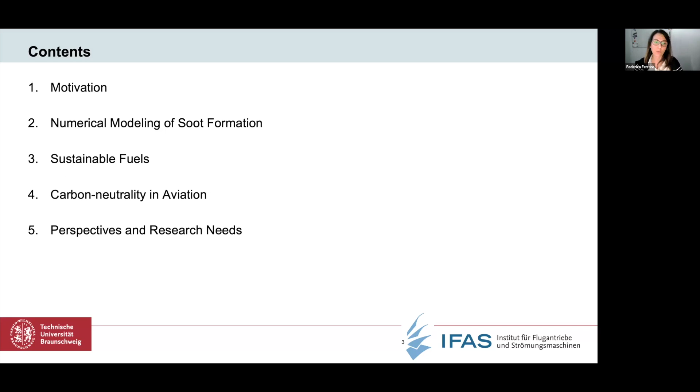The first question I would like to answer today is why we should still care about soot even with sustainable fuel. As a combustion research community, our overarching goal is to try to improve our current technology and, as a society, reduce the increase of temperature and global warming below 1.5 degrees Celsius until 2050.

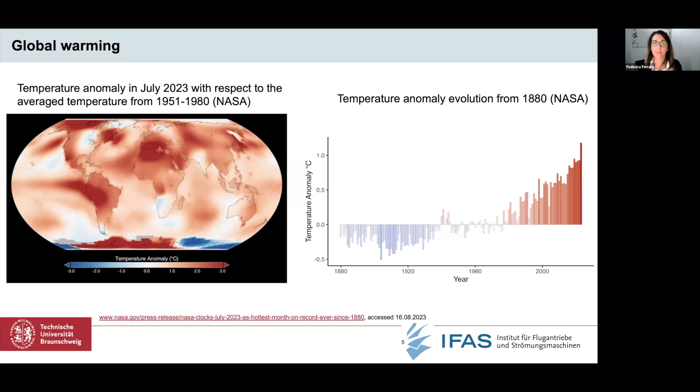So from atmospheric research, it's basically clear that this temperature increase is due to anthropogenic emissions related to human activities. So we are talking about industrialization, but also transportation.

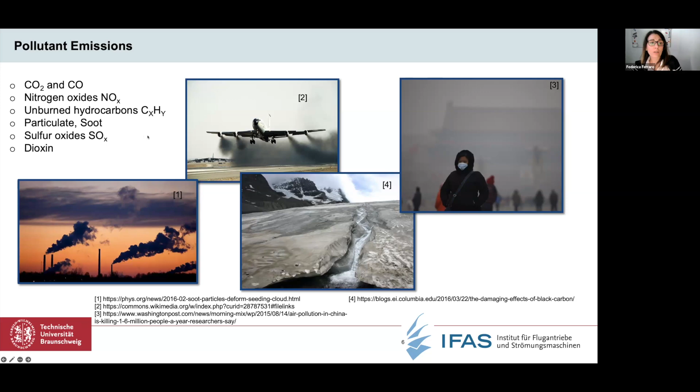So basically, this is the scenario in which we are moving, and when we move from current hydrocarbon fuel to some sustainable fuel, we should take care not only about CO2 emissions, but also how this new type of fuel that we would like to introduce affects the different types of emissions and soot particles.

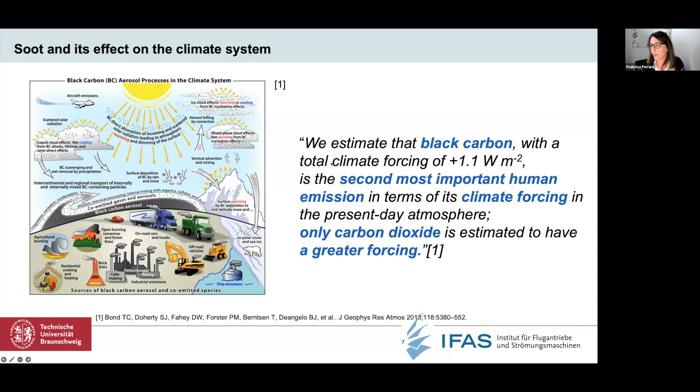In order to understand which sectors are affected by this, I would like to discuss a little bit the latest results, some data published this year from IRENA, the International Renewable Energy Agency, on hard-to-abate sectors.

So there's heavy-duty trucks, shipping, aviation, and then hard-to-abate industries like the iron and steel industry, and also chemical industry. This hard-to-abate sector, obviously in different ways,

are defined like that because the electrification transition towards zero carbon emission is quite challenging due to the specific peculiarity of the processes involved in the energy transformation, and also because even though there is a lot of research in these sectors to decarbonize them, the maturity level of the zero carbon technologies is still quite low.

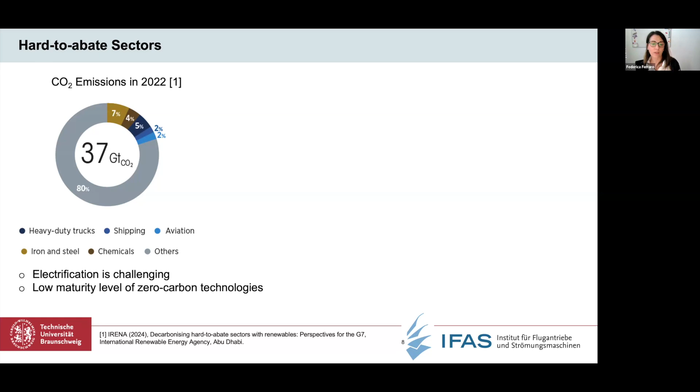In this report, they basically try to give some advice to politicians, to people developing policy, on which direction they have to support the transition, and which are the most important aspects related to this hard-to-abate sector. So for this sector, it is not possible to think that by 2050 everything will be completely decarbonized at a level of technology maturity like it is today.

So in this talk, we are going to discuss some of them, in particular the transition related to the hard-to-abate transportation sector, where in the short term and medium term we can think that liquid drop-in sustainable fuel will be of major importance to reduce carbon emissions.

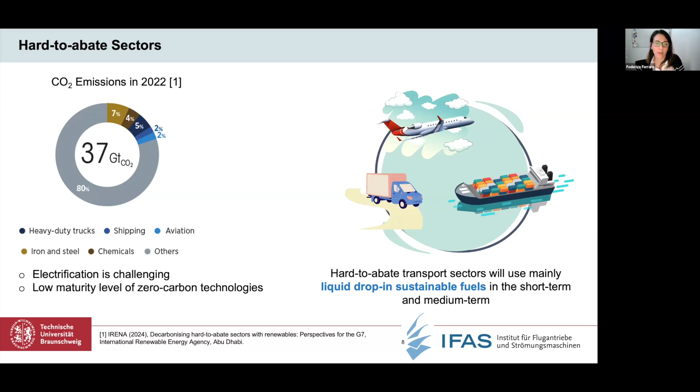So we are basically talking about carbon neutral fuels that can be produced or generated using the power-to-liquid concept, which means we are basically using renewable energies for the production, and also carbon capturing from the atmosphere, or we are taking the carbon from waste or biomasses.

This type of fuel can fit in the current infrastructure. This means it can be directly used in current engines or current burners, or they can be used with minor retrofitting.

Due to the different chemical structure of this fuel, we can reduce carbon emissions, and in some cases we can even achieve sub-zero, a negative carbon emission, meaning that we are taking more carbon from the atmosphere than what is released after combustion.

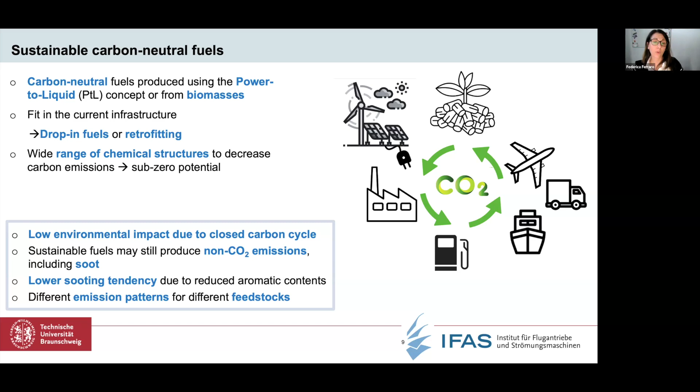Therefore, we need to understand how this sustainable fuel works, or how it performs in the different types of engines that we have to decarbonize. With that, I would like to move to the second part and discuss how we can model soot, the model that we have used in our group in the last years.

When we deal with soot formation, we are talking about a complex multi-phase problem. For example, in an aero engine, we inject fuel in liquid form, so we are talking about at least a two- or three-phase problem: we inject fuel in liquid form, then the fuel evaporates, becomes gaseous, combustion occurs, and after that we may have the formation of soot particles.

When we want to model this with numerical simulation, we need a model that accounts for the entire chain. We need a gas phase mechanism able to characterize in detail the formation of the soot precursors, which are the large polycyclic aromatic hydrocarbons. We also need a model able to consider the formation of soot particles and the transfer of mass between the gas phase and solid phase.

When particles are formed, they interact with the underlying gas phase, and there is also interaction between particles. This effect needs to be considered in our model in order to track the evolution of soot particles and eventually their oxidation properly. Obviously, the coupling between the gas phase and the soot phase also needs to be considered to account for the mass transfer from gas phase to solid phase.

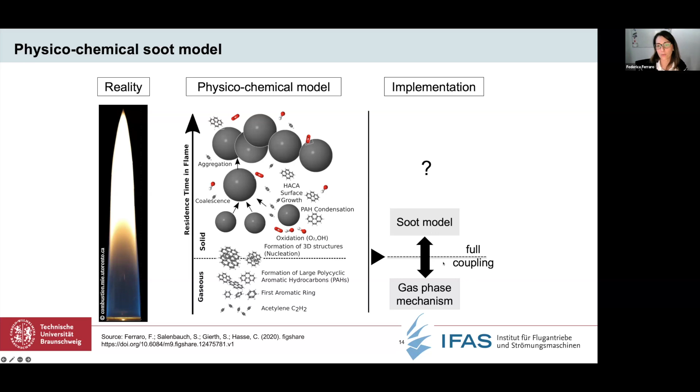After the model is conceived, we need to validate it, and normally this is done from simple to complex, meaning we start with laminar, simple lab-scale flames. Then we move to turbulent cases, still at lab scale and atmospheric pressure. Then we move on to model something more complex.

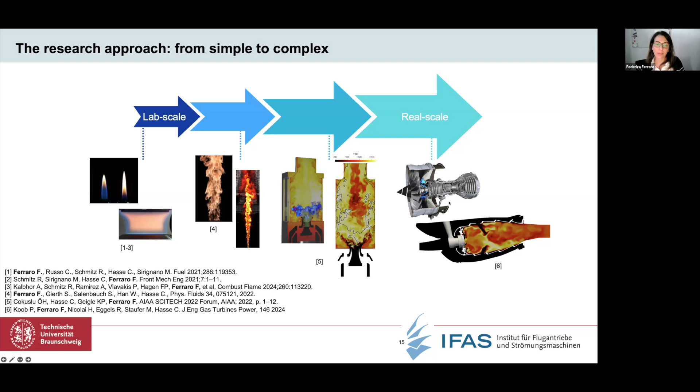For example, a lab-scale model gas turbine. Only when we have achieved this level of confidence in our model can we think about performing simulations of real-scale engines, where we have a very limited amount of experimental data to validate our model. So the validation process starts here, and after we reach this level of confidence that our model works well in different conditions, we can apply it to very complex and expensive simulations.

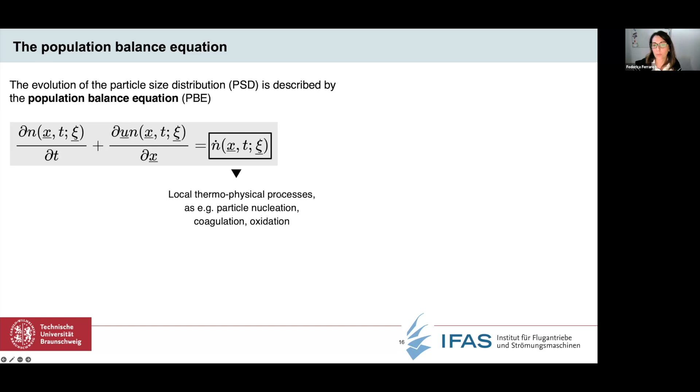The source term on the right-hand side of this equation represents the local thermophysical processes which describe the particle evolution, meaning particle nucleation, coagulation, and eventually particle oxidation.

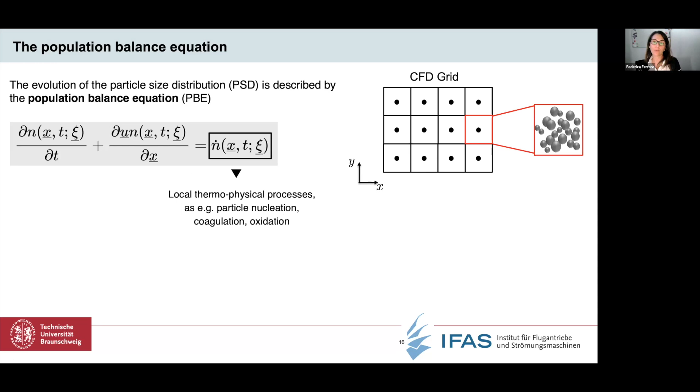Looking at the way this equation is written, if you consider that we are solving it using a finite volume concept, normally we have one value of the variable we are solving for in the CFD grid, or in the CFD cell. In this case, we don't have a single value, but a distribution which looks like that. So on each cell, we have a distribution function of the particle properties, which, as I was saying before, can be particle diameter or particle surface.

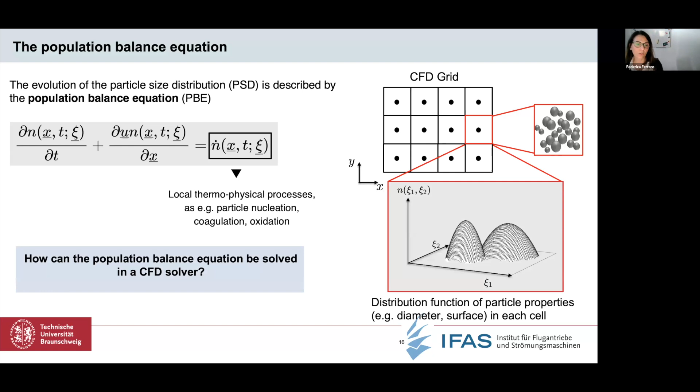So now this is quite complex and cannot be solved directly using the standard CFD solver that we use when we solve the Navier-Stokes equations.

In our group, we use the method of moments, which applies a transformation of the population balance equation for the moments. So we have this equation that depends, as I was saying, on space, time, and the vector xi of the internal coordinate of the particle properties.

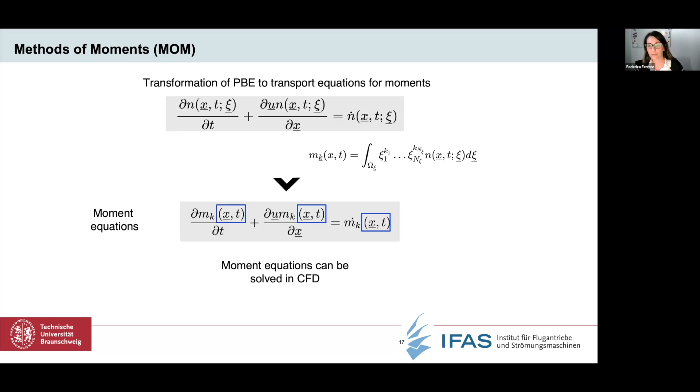If we apply the definition of the moment, which is the integral of the internal coordinate, the different components of the internal coordinate to the power of the moment, multiplied by the particle density, what you can see is that we obtain a moment equation that depends only on space and time. This equation can be solved without any problem in any CFD code, because it depends only on space and time.

Obviously this transformation doesn't come for free. We still need a closure for the source term, which, as you can see here, depends on the particle distribution. We need to apply a closure model, and in this case we are using the quadrature-based method of moments.

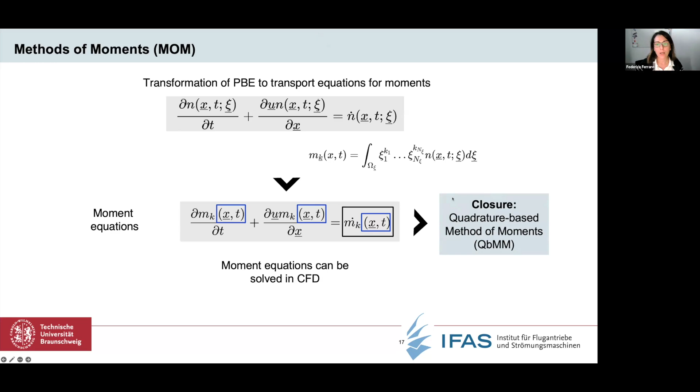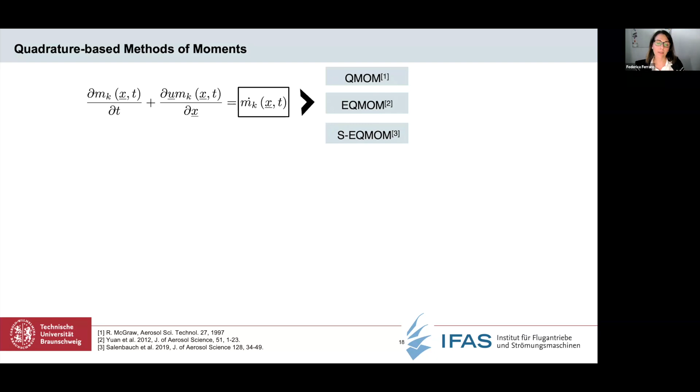In the literature, there have been different types of closures for the method of moments. You see here in the references, we have the standard quadrature method of moments, the extended quadrature method of moments, and in my group in Darmstadt, the split-based extended quadrature method of moments, which has been developed by Salenbauch and co-authors in 2019. We have applied this to a series of simulations and test cases that I'm going to show in the next slide.

This also allows for numerical robustness, because we transport each sub-number density function independently, and they are then coupled together through the coagulation term. Each sub-number density function is solved by transporting only the first three order moments of the distribution. This allows us to solve only low order moments and to achieve the numerical robustness that we need when we want to calculate very complex and accurate simulations.

So this is the description of the model, and now, following our research approach from simple to complex, I'm going to show some examples of the application of this split-based extended method of moments to different types of flames. Obviously not everything we have done, but just some examples to show how our approach has developed over the years.

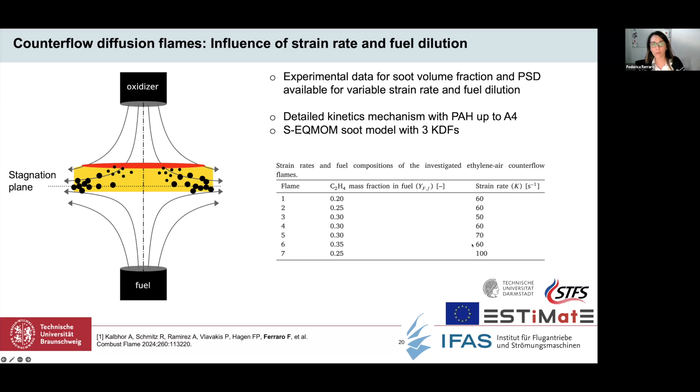After that, we analyzed this data. We investigated what is happening in terms of soot formation and the different types of processes happening on the soot particles. For this, we analyzed the different source terms, and you can see here the inception, condensation, and HACA source terms for the different strain rates.

Even though the soot volume fraction was different, and we have seen that it decreases while the strain rate is increasing, here we can see that the soot source terms have a very small influence on this. This tells us that the reduction in soot volume fraction is due to a smaller residence time of the particle caused by the increase of strain rate.

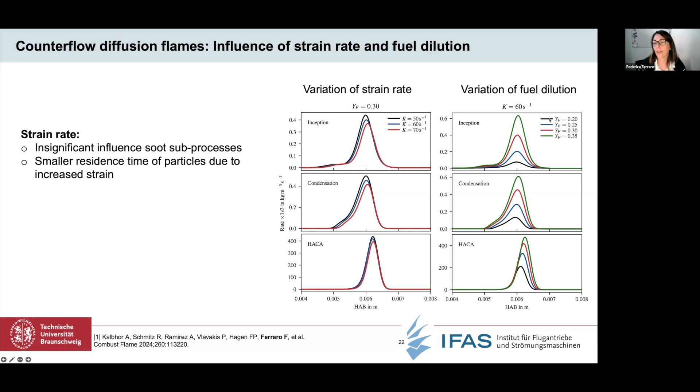If we now compare what happens at the source term when we varied the fuel dilution, again increasing the amount of ethylene in the fuel, we see a significant difference in the source term for the different flames. In this case, we see a visible reduction of the inception process and also of the other phenomena, condensation and HACA, which are responsible for the soot surface growth.

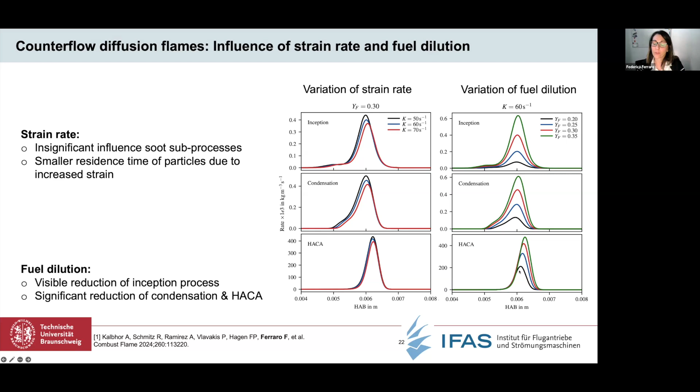This tells us that even in a very simple laminar flame configuration, we have different modes of action, and our model is also able to quite well reproduce this phenomena when compared with experimental data. So after this step, we looked at some more complex flames, and we moved to the simulation of turbulent flames.

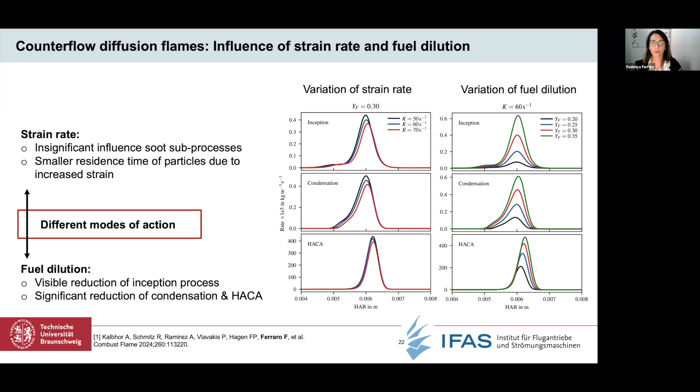For this case, we chose one of the target cases of the International Sooting Flame workshop, as I was mentioning before. This is a natural gas diffusion flame where we have a fuel containing methane and nitrogen.

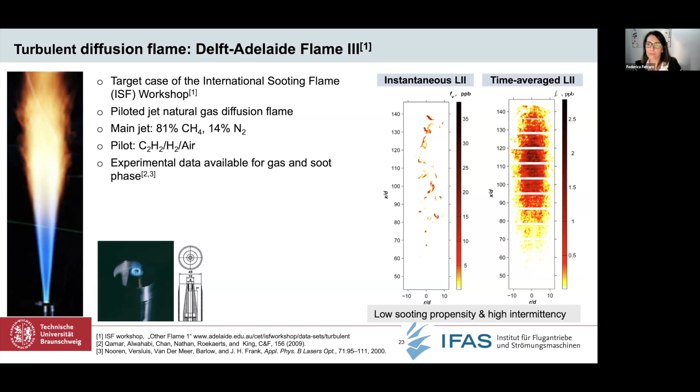Here is the experimental data regarding the instantaneous LII, and also the time-averaged LII. Due to the properties of the fuel, being a methane flame, we have a very low sooting propensity and also high intermittency. This means that in the experiment, these results have been generated averaging for a longer time, and in our simulation we also had to average for quite a long time to get significant statistics.

For this type of flame, we applied a different modeling approach for the gas phase. We used a tabulation strategy, creating flamelets using a counterflow diffusion flame configuration, and we saved the entire thermochemical state in our table.

We applied a beta PDF integration and created a database that can be accessed using a reduced number of variables, not the entire thermochemical state, but only three variables: the mixture fraction, its variance, and the progress variable. This table is then coupled with our OpenFOAM framework, and we could calculate this flame in our CFD solver considering only three control variables, accessing this table.

For the coupling between the gas and solid phase, an additional transport equation has been solved, considering a lumped PAH species, which is then coupled with the soot model. This source or sink term considers the transition of the carbon atoms, or PAH, from the gas phase to the solid phase.

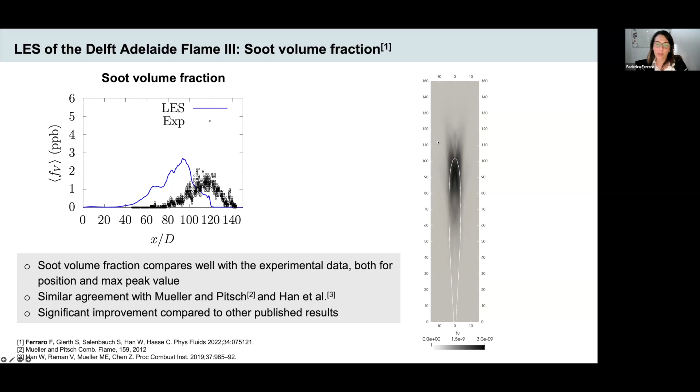Our approach, this SEQMOM model I was mentioning before, allows us to reconstruct the particle size distribution, which is an important characteristic to analyze when we move from standard type of fuel towards something sustainable, since we also want to minimize the particle dimension. Therefore, we need methods that allow us to characterize the particle size distribution.

What we can observe is that the maximum particle diameter of this flame is quite small, and this is also consistent with the fact that we are burning methane as a fuel and not a more complex hydrocarbon.

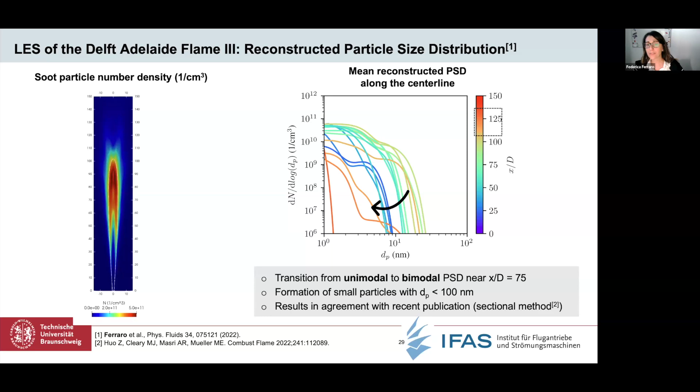After this analysis on the turbulent flame, we performed further investigation on a more complex case: a full-scale aero-engine combustor, the BR710 combustor from Rolls-Royce. This is another activity done during this ESTiMatE project at STFS in Darmstadt.

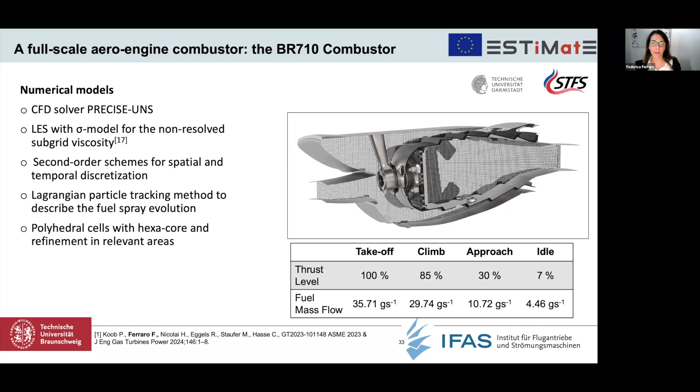In this case we used a different solver, as part of the collaboration Darmstadt has with Rolls-Royce. You can see here the grid we used, which is quite refined in the rich region. This is a rich-quench-lean aero-engine combustor, and we performed large eddy simulations at 4 different operating conditions, corresponding to different thrust levels and fuel mass flow, which lead to different types of emissions during the flight mission.

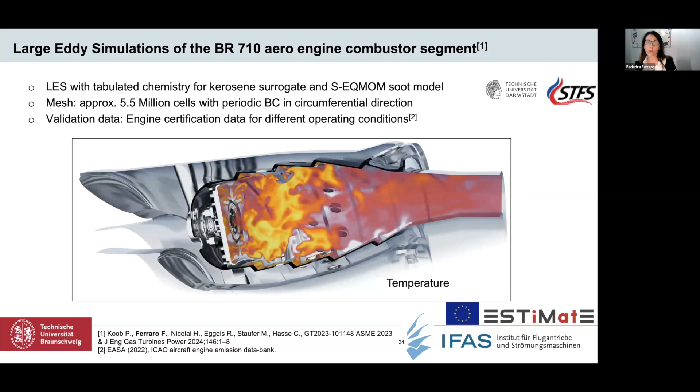Let me show you some results. This is a video of the temperature. You can see that we have high temperature in the rich region. Then the temperature is reduced, and also the soot volume fraction is reduced, due to the secondary air injection in the quench zone.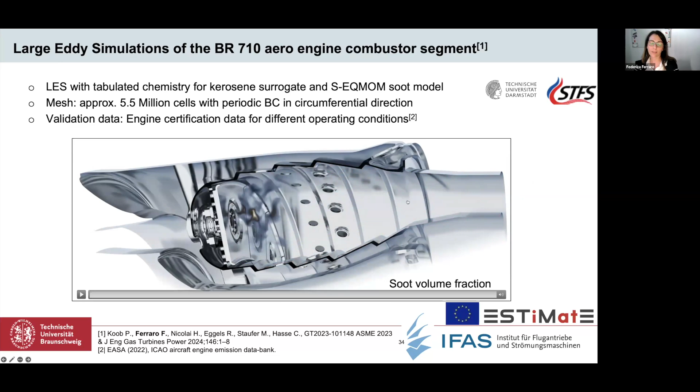And then the last part is the lean region of the combustion chamber. We can see here the time average and also the instantaneous soot volume fraction at the different operating points, going from the maximum of the fuel mass flow at takeoff to the most lean case, which is idle. We basically see a significant variation from the most rich case, takeoff at 100% of the power, to 7% at idle. So there is a significant variation in the soot volume fraction.

What we also observe is that in the quench region, we only have very small soot pockets remaining, and then we basically see that only a few amount of soot volume fraction remains not oxidized in the lean region.

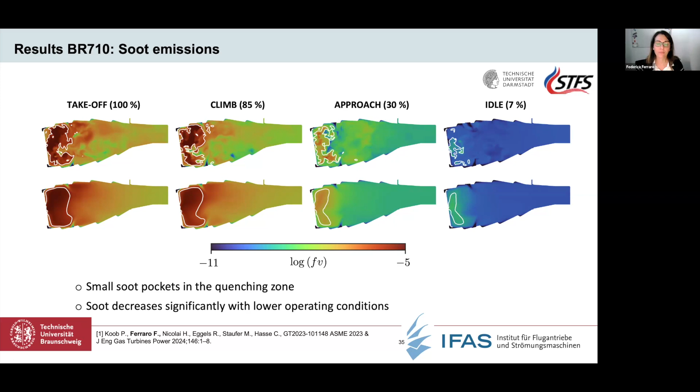In order to better characterize these results, we have compared this with experimental data. You can see here the different conditions we have compared, with experimental data from the ICAO database. As I was saying, for this very big real scale combustor, we only have a few experimental data points. In particular, the emission index of the soot particle is averaged on the outlet of the combustor, so we don't have the possibility to tune or validate our model to understand where the weak part of our model is. Therefore we need all the validation that I showed you before.

What you can also see here is that we obtain an overall good agreement with the experimental data. We only have a little bit of under prediction at the takeoff condition.

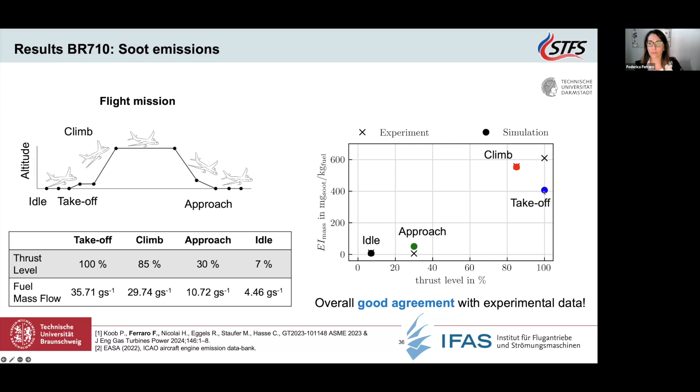Exploiting the results we obtained with our detailed soot model, we could analyze the particle size distribution in the combustion chamber, at the four operating conditions and in different regions: the rich part, the quenching part, and also downstream in the lean part. What you see here is that in the rich part, as we expect, we have a bimodal distribution at maximum power, at takeoff, and then at idle, which is the leanest case, we basically obtain only a unimodal distribution.

Then we observe that the particle number is slightly reduced in the quenching zone due to particle oxidation, but we still see a bimodal shape, while in the lean region we can see a significant reduction of the particle size and particle density due to oxidation. What you can also understand is that we need some residence time for the complete oxidation to take place.

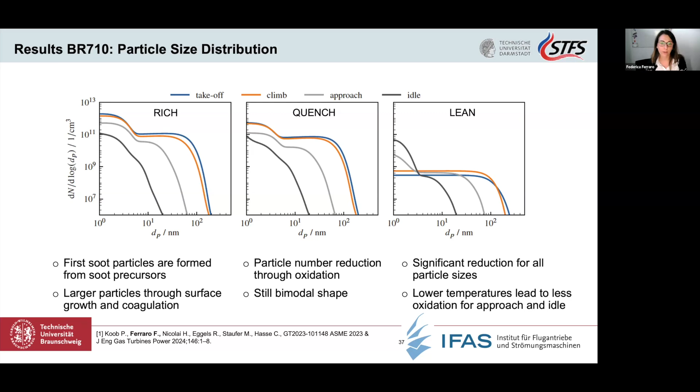Okay, so with that I would like to move to an example of sustainable fuels. All that we have shown has been done considering standard hydrocarbon fuels. When we move towards sustainable fuel, the entire chain needs to be redone in order to evaluate if we have a proper model, and if we are able to evaluate the same turbulent lab scale flame and also the more complex case with sustainable fuel. So the example I'm showing is only to illustrate how the particle size distribution changes when we use sustainable fuel.

This is an example of oxymethylene ethers, which are fuels studied as a substitute for diesel engines. What you can see here is different types of fuel, different classes: alcohols, ethers, and biodiesel. In our study, we have analyzed oxymethylene ethers, which are called PODE or OMEs.

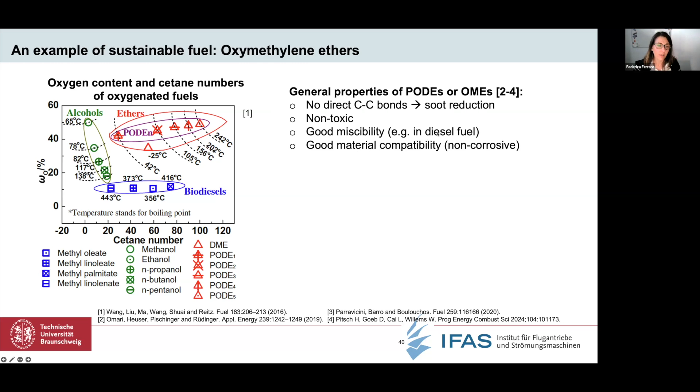They have, as you can see, a high cetane number and also high oxygen content, therefore they are selected as a substitute for diesel fuel. They have no carbon-carbon bond, and therefore allow, when burned, a significant soot reduction. They are not toxic, and they mix very well with diesel fuel, for example in blends. They are also not corrosive, so they have good material compatibility, and therefore have been studied and selected as blending agents for diesel fuel.

There are different types of molecules. We have focused our attention on OME3 to OME5. As you can see from this graph, they have a suitable cetane number and also a suitable boiling point for self-ignition engines.

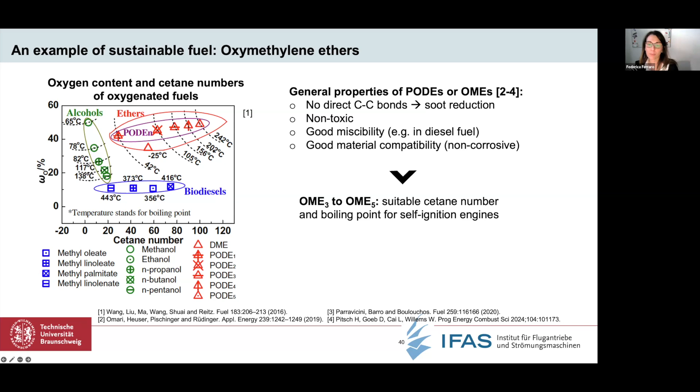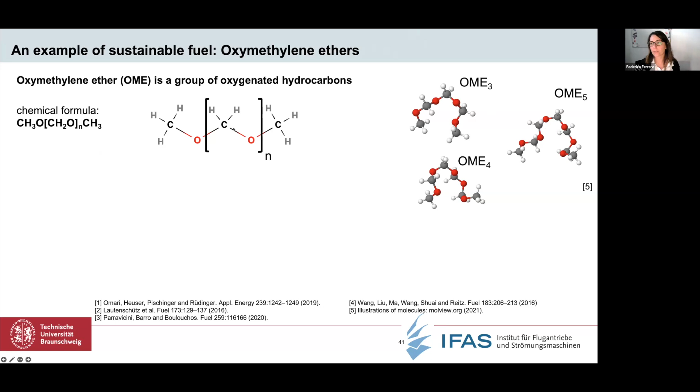These are the chemical formulas. The OMEs have basically this CH2O group, which can be replicated many times, so you can see here that the form of the molecule changes. If we have OME3, we have 3 of this group, and so on. So 4 and 5 in this case that you see here.

So the research on sustainable fuel has been done like that. There have been tests at engine scale that show that blending OMEs with diesel, or burning OME pure, leads to a significant soot reduction, but it was not clear why.

So in order to efficiently use the sustainable fuel that, just to remember you, is not available in large amount, we need to answer as researchers several questions. First, what is the mechanism of soot reduction? Then, is there a soot suppression effect, or a dilution effect, when we blend these fuels? And then, which of these OMEs, since we have different types of molecules available, is most suitable to be blended, and also what is the blending ratio, and obviously many other questions.

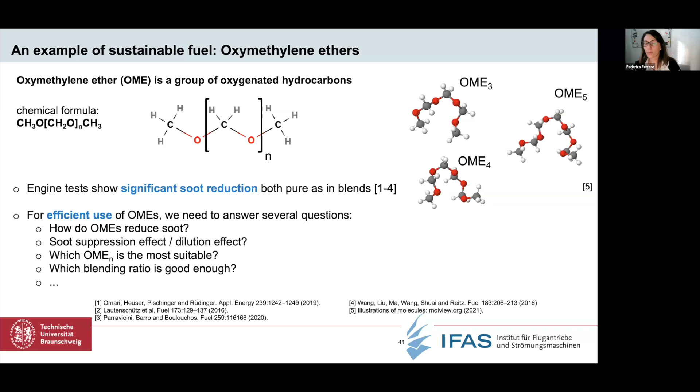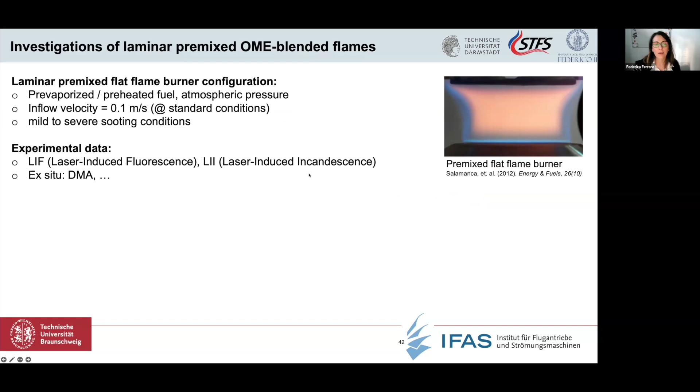So we have done this in collaboration with the University of Naples Federico II, with Professor Mariano Sirignano, who provided us experimental data of laminar premixed burner configurations, the one you can see here. They've done LIF measurements, so laser-induced fluorescence, and also LII, and we have done the corresponding numerical simulation of this.

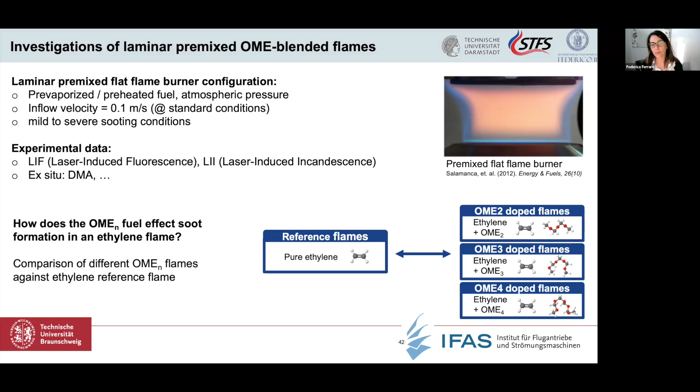We have a reference flame, which is a pure ethylene premixed flame, and then we have doped this flame with 20% of OME 2, 3, and 4, to evaluate the effect of this. Consider that when we perform this kind of experiment, the boundary condition also has to be selected properly in order to be sure that we are looking at the exact effect. So basically, we have kept the carbon flux constant in order to really look at what is happening in terms of soot formation. So let me show you some results.

So what we are basically observing is that the OME blending, so the blending with sustainable fuel, is reducing the dimension of the particles, but the small nanoparticles remain almost untouched. This is obviously quite important, because the smallest particles are also the most difficult to filter in a car, for example, or in heavy duty trucks.

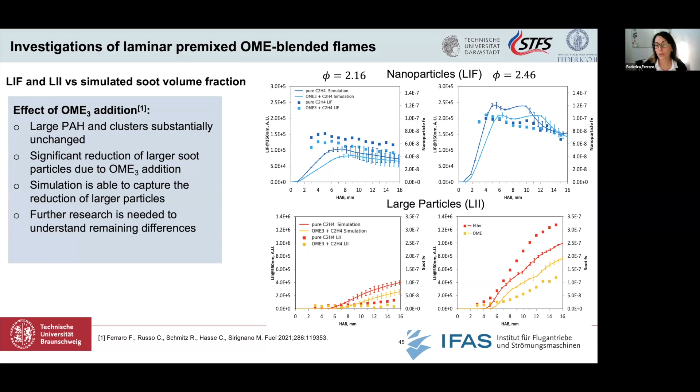Here you see a summary of the results. We observed that the small particles are substantially unchanged, while we have a significant reduction of larger soot particles due to the blending with an oxygenated fuel, and also that our simulations are able to capture this trend.

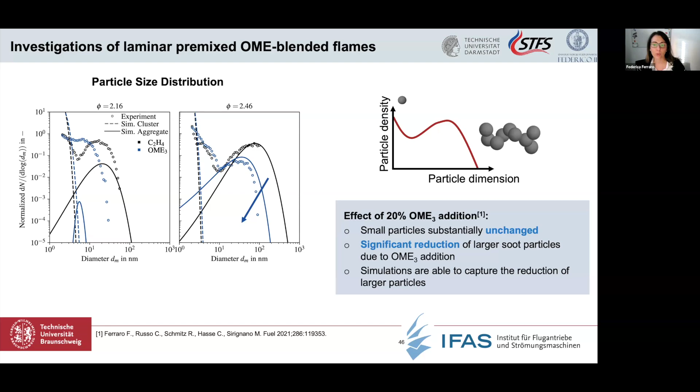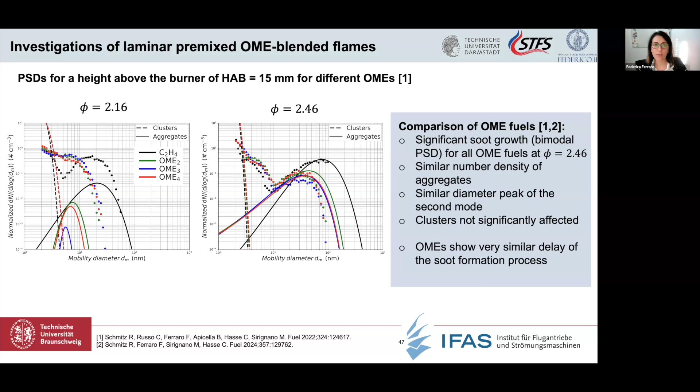Okay, so this was an example of sustainable fuels. And now I would like to go a little bit more into perspective and discuss how we can reduce the emissions in aviation.

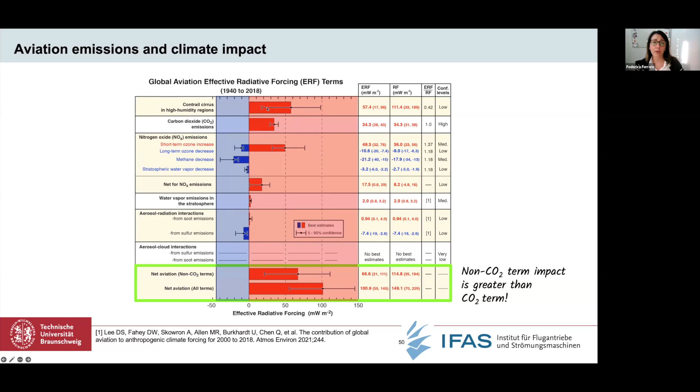So let me explain more in detail. The white stripes that you see behind the airplane, when you look from the ground, are formed basically from water vapor coming out of the engine and soot particles. These are called contrails, and they are basically due to the fact that when we emit different products, soot particles and water vapor are two of them.

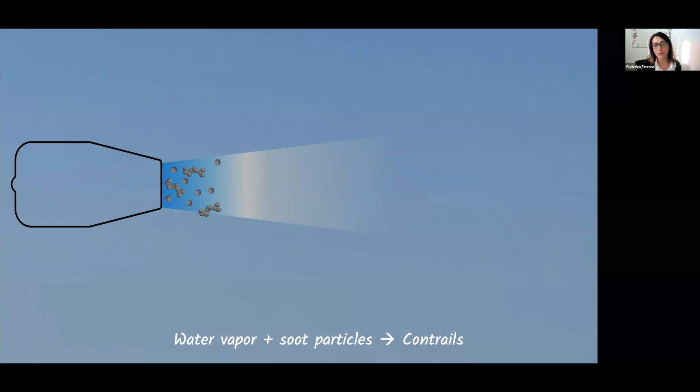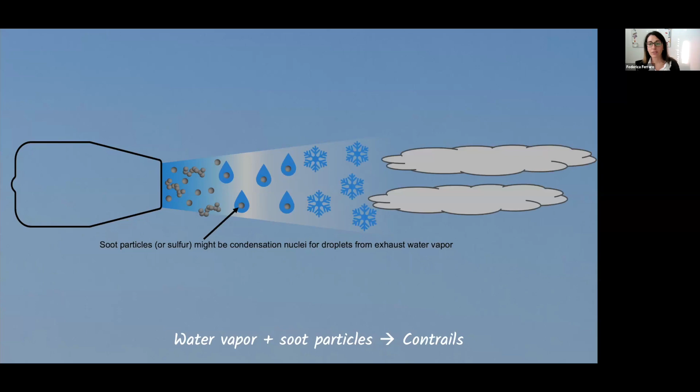Due to the temperature outside the engines, when these products are injected into the atmosphere at very high altitudes, they can condensate, and the soot particle can act as a nucleus for the water to condensate and become ice. This creates artificial clouds, which are called contrails. These additional clouds can reflect the incoming sun rays, and therefore have a cooling effect, but on the other hand they can reflect the thermal radiation from the Earth, and therefore have a warming effect on the planet. They basically act as a blanket on the Earth.

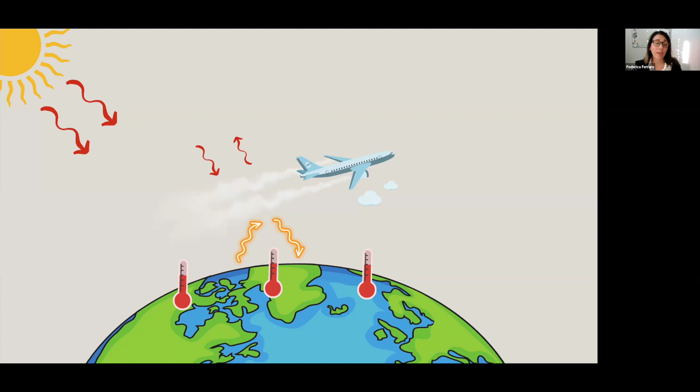So this is basically what is happening. And now the question is how we can decarbonize and make aviation sustainable. The answer is not obvious, not one single answer. We have different types of flight missions, so different types of aircraft - very short range, medium range, and long range - and in all of these sectors we can have different types of strategies.

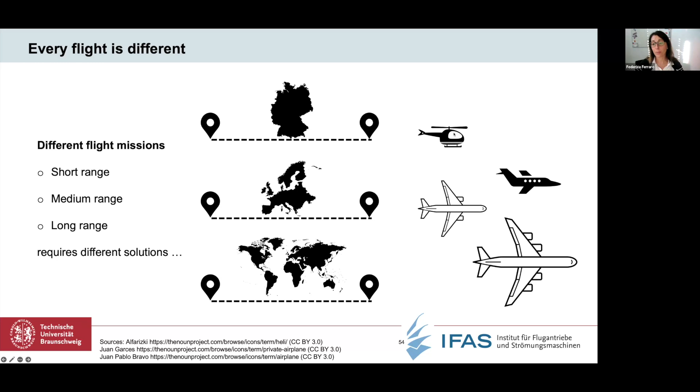For example, electric flight is something that is very much researched today, and is already a reality for very small aircraft, like helicopters. For bigger planes, it's something that is still under investigation. So let me show you the different types of strategy that are currently being investigated to minimize the climate impact of aviation.

There are strategies related to technological advancement, meaning improving the performance of the aircraft today, so we can maximize the performance of the combustor. This is already happening in the last 40 years, so we can minimize pollutant emission by improving combustion efficiency. There are other strategies related to the aerodynamics of the aircraft and improving air traffic management. This is all related to technological advancement.

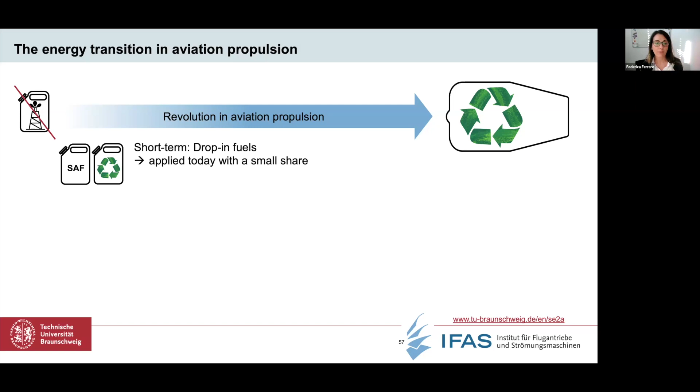The revolution in aviation propulsion means that we have to abandon fossil fuel completely in the near future. In the short term, what we can do is use drop-in fuel, which today is applied with only a small share because it's only available in a small share. Midterm and long term, we're going to use non-carbon fuel, like hydrogen. And in the long term, we already see a lot of research in electrification and new concepts of engines and entire airplanes that will probably be available.

In Braunschweig, we are working on this in the Excellence Cluster Sustainable and Energy-Efficient Aviation. Today I talk about some of the research that will be continued in this excellence cluster, in particular drop-in fuel as well as hydrogen combustion, but there are a lot of colleagues working on electrification and also improvement of the aerodynamics of the aircraft for the future.

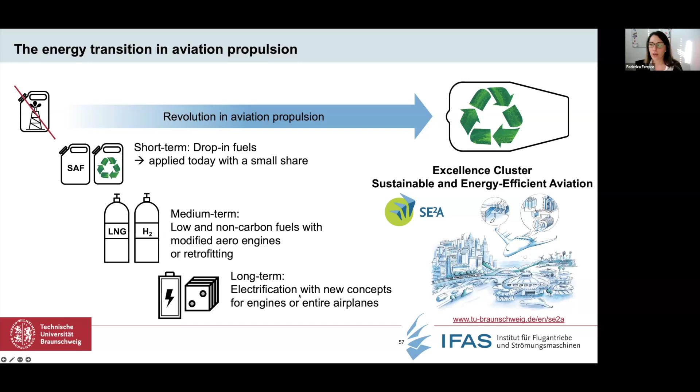The forecast in sustainable aviation, as you can see here, this is the net CO2 emission measured with data from 2005 until today. This is a report from 2022 from the EASA. What you see here is that aviation emissions dropped significantly during COVID, and now we are basically here, so there is a recovery of the sector. What you see here is different types of scenarios, what happens to CO2 emission if we apply different strategies. I don't want to go into detail on this.

I just want to show you the effect of sustainable aviation fuel, so-called SAF, on the CO2 emission. The net CO2 emission can be halved if we use SAF. The major challenge today is that these are not available in a huge amount, and the price of the available SAF is also very high.

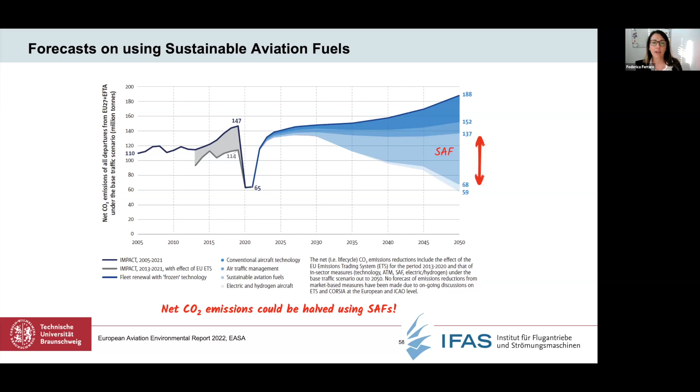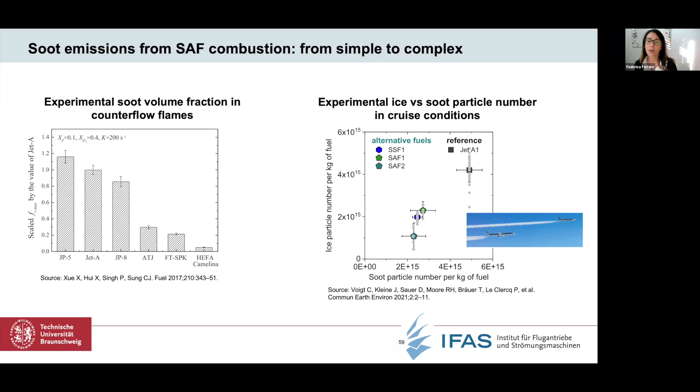So this is quite good news. We already know that sustainable aviation fuel can support decarbonization and help reduce the climate effect of aviation. There is a lot of work to do still, so these are some of my perspectives. SAF has the potential to be used basically today already in the engines we have available, to achieve carbon neutrality in the short term. It has a high potential to reduce the climate impact of aviation, and there is also legislation supporting the utilization of SAF up to 70% until 2050.

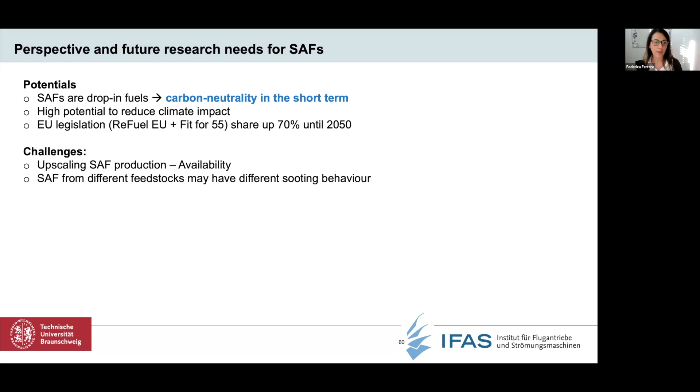There are some challenges that I mentioned a couple of times. We need to upscale the production of SAF, increase the availability, and hope also for a reduction in price. And also in terms of emissions, an additional challenge is that different types of SAF produced in different places from different feedstock may have different sooting behavior. So it's difficult to generalize the results for every kind of airplane and every kind of fuel.

What we still need to achieve, related to SAF, is understanding the sooting behavior of different types of SAF through targeted experiments and simulation. So again, a strong collaboration between experimentalists and numerical researchers is very important.

We need to evaluate not only the CO2 emissions - we've seen that CO2 is obviously reduced because it's a carbon neutral fuel - but the non-CO2 emissions are also important, and this needs to be done at real conditions, so aero engine operating conditions, high pressure and high temperature. And we need to select the proper sustainable aviation fuel so that we can minimize both CO2 and non-CO2 emissions.

Another challenge or future direction could be to build tailor-made sustainable aviation fuel mixtures that can reduce both large particles and ultrafine particles. I haven't discussed the ultrafine particles too much, but airplanes produce most of the soot at takeoff, and if the ultrafine particles are not changed when the airplane takes off close to the airport, we will still have a lot of pollutant for the local air quality. This is an aspect that should be mentioned.

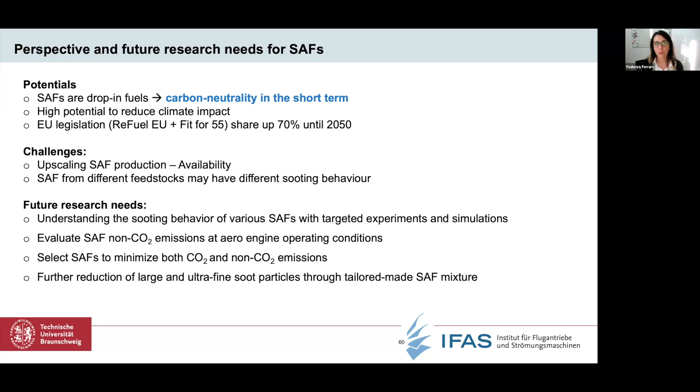With that, the conclusion: I think achieving carbon neutrality is a huge but feasible societal challenge. We have at the moment diverse technological solutions with different levels of maturity, so we need to continue working on that. We need to optimize the resources we have available, sustainable aviation fuel in this case, or sustainable fuel in general, to understand which energy sources we can use, when we can optimally use them, and how we can optimally use them. Obviously, the disciplinary strategy and the assessment of all this strategy is important.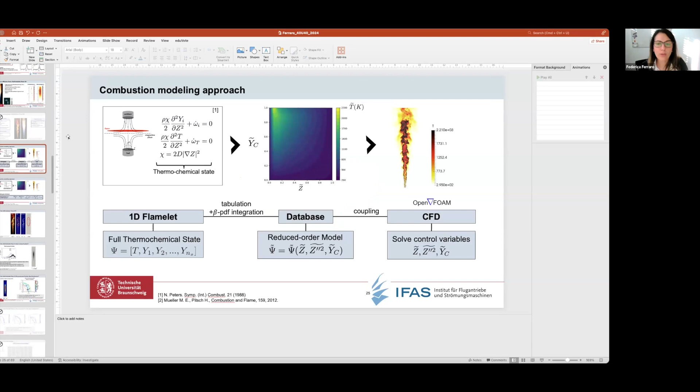Let me move to the slide. So basically in this flame, we haven't considered the progress variable variance or the heat transfer. Actually, there is no wall here because this is an open, lab-scale, ambient pressure open flame.

That's why we haven't considered the heat losses to the wall. We have seen that radiation, the gas phase radiation, has a small effect in this case, so that's why we haven't considered that.

Regarding the progress variable variance, when we select the complexity of the model, we start always simple and move to complex. So we tested with three variables: mixture fraction, variance of mixture fraction, and progress variable. We've seen that we got good results, and then we basically continued with this methodology.

I know that depending on the different type of configuration, you may need more variables, so this is not excluded. It's also not excluded that we may improve our results. We haven't tested that, so it could be that using a more complex model could improve things a little bit.

But as I said, for this flame, other types of modeling approaches that have been used, more complex than what we have used, also show very similar results in terms of gas phase and soot phase.

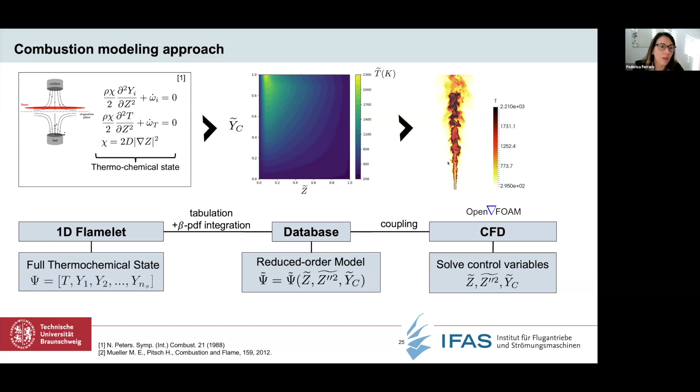I haven't shown the gas phase results here, let me see if I have them... No, unfortunately I don't have that slide. But if you look at the paper, the gas phase result is overlapping basically with the experimental results, and then we just stopped complicating the model further.

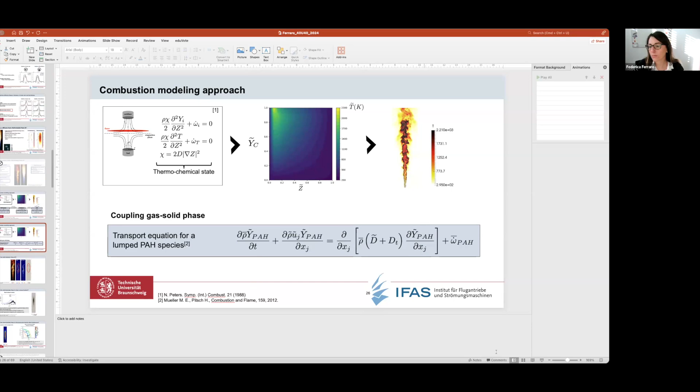Thanks. I don't know if there are other questions. I don't see them in the chat. Okay, I think we can move on.